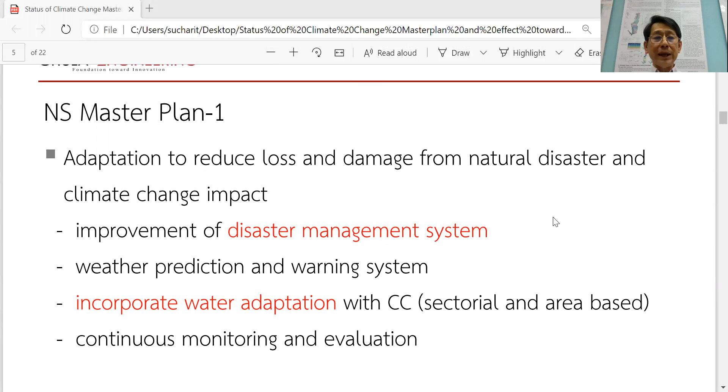So in the master plan, we identify that based on the climate change impact, we need to improve our disaster management system based on the risk level. We would like to incorporate water adaptation with climate change into the normal project development. So these are two main points in the master plan. At the same time, for the promotion, we need some new measures for economic and finance or budget support to implement such schemes. But for the large scale public infrastructure, we need to analyze and assess the impact starting from the project design phase. So this is mentioned in the master plan.

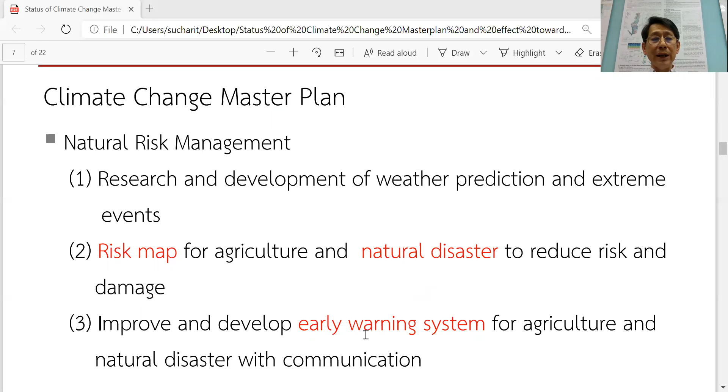After that, we have the climate change master plan. In the session of natural risk management, we also say that we need to have the risk map for both agriculture and natural disaster to reduce risk and damage, and also improve the early warning system for both agriculture and natural disaster with better communication. So these are the items in the climate change master plan. In order to implement that, now it's a kind of collaborative scheme.

But in the near future, we are drafting the Climate Change Act, in which, in the adaptation part, we have mentioned that we need to make a better prediction system so that we can assess the risk. So the identified agencies, the Thailand Meteorology Department and the Office of the National Environment Board, take care of this. This information will be informed to the concerned parties so that they can prevent or mitigate the risk of this kind of natural disaster. Where there are no rules, the National Climate Change Policy Board will consider and ask for cabinet approval for those cases.

Now we have a national adaptation plan, and we are monitoring. So with this act, the implementation under the law will be more officially enforced for public infrastructure development. So now, based on the cabinet resolution, we identify that large-scale infrastructure development needs to consider climate change impact assessment from the project design phase.

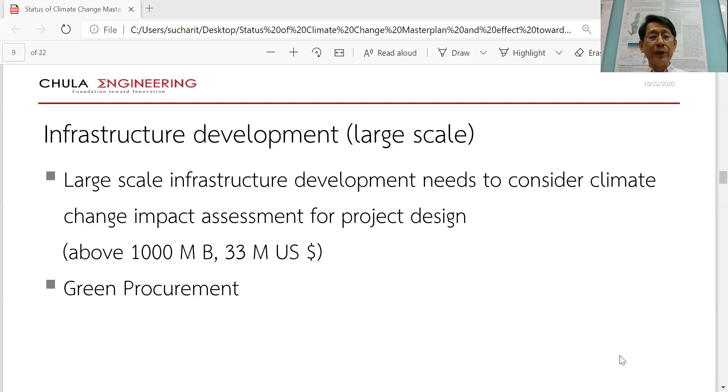So from our study, we also make a risk map. We also consider how much the climate, from weather conditions like temperature and rainfall, will change more. We have a certain rate, and in that area, if the impact is high, this will render much damage. So we divide the area into 4 zones: zones with high impact and high risk, low impact and

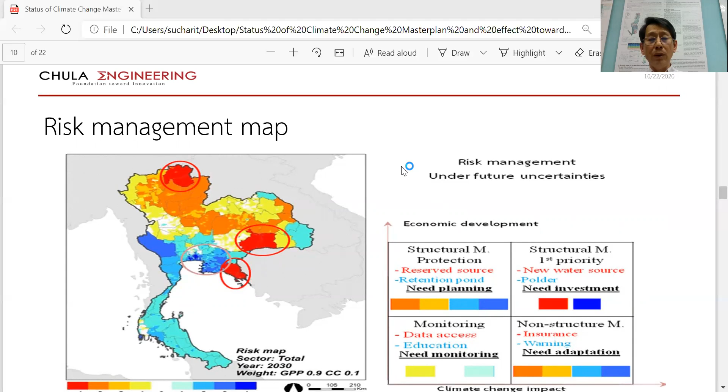So this is the basis for future infrastructure development, and the structural design may need more consideration when we build or design. So from that, we define the approach: for those areas with high risk and high impact, maybe we need new investment in infrastructure, like dikes or even dams. And for design criteria, up to now for a city we may set a 25-year return period. But in these highly important areas, they may raise it up to a 50-year return period.

For high risk but low impact, we may just modify our structures and link them to some retention or supplementary design. Maybe we need to heighten the dams we have, or need more retention. For low risk and high impact, we need some adaptation, like a warning system or evacuation areas. Then for the low risk and low impact areas, we need only monitoring and informing people when the disaster comes. So this is an approach for the area-based

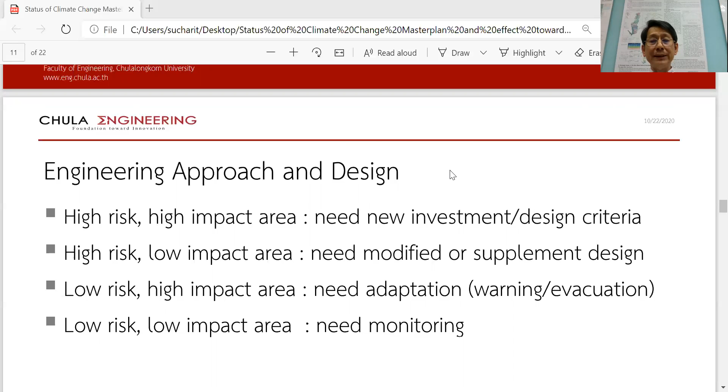vision. When we talk about areas by land use type, we also define measures for the city area, the municipal area, like a small city area, and the rural area. In the city, we are now trying to mix measures. We use both polders and a drainage system. We also have some retention from canals or retention areas, and then we zone the city area. There are green zones and some red zones. So we are now improving our infrastructure by giving it a higher return period design, from 25 to 50

years return period. But for the municipal area outside, maybe we can improve the measures we already built, but add more green-based solutions like retention or parks, or even areas with less population can be used as temporary retention. While in the rural area, the warning system. And we also try to make a community plan in certain areas with a lot of people. Outside, we use more nature-based solutions, for example retention areas, so that they can live without high damage from the disaster.

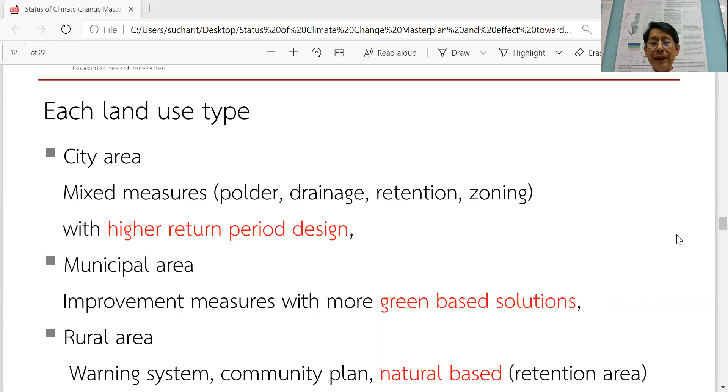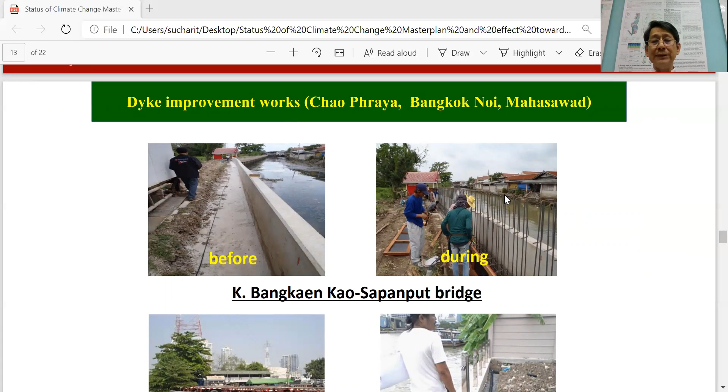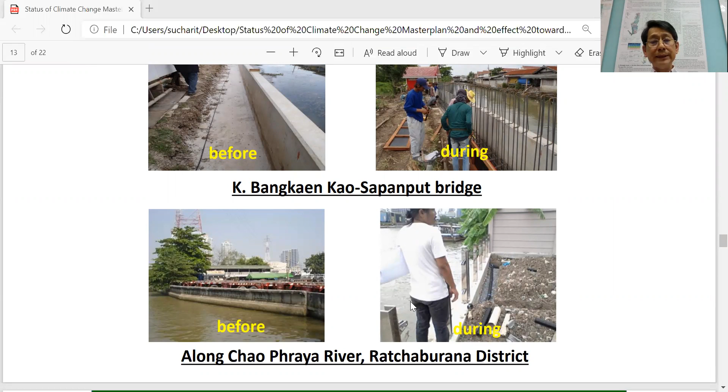So these are some samples that we made. You may remember in 2011 we had a big flood. After that, especially in the Bangkok area, we heightened the dike around the city. Before it was 25, now it becomes a 50 or 60-year return period based on the last extreme cases. This is the picture of us improving the dike, and then we made some heightened structures. These are some samples along the Chao Phraya, Ratchaburana area. So we heightened everything in the city to have a safer design.

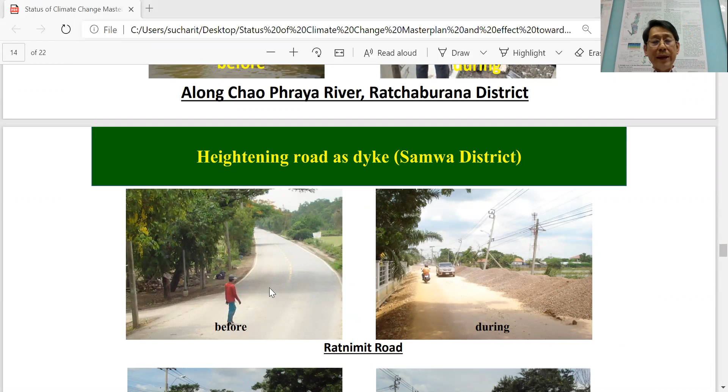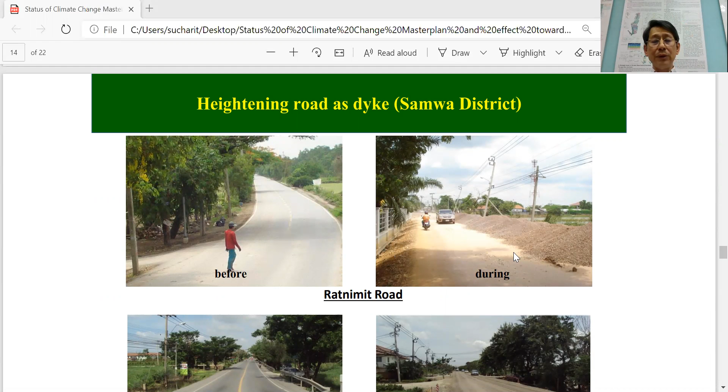In the area outside, yeah. If we have a certain area, we now heighten our roads so the road can be used for transport and also as a dike during flood time. So this is the measure in the municipal area: we can surround those municipal areas with a heightened road structure.

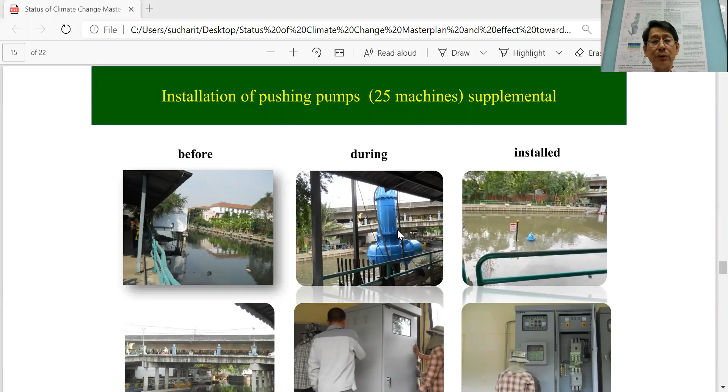Again, after we make a dike, we need more pumping capacity. As we know, in the city the canal area is very limited, and conveyance capacity is sometimes limited because of the high rain. So we install what we call pushing pumps in many areas where the section of the canal is smaller than in other areas. These pumps can increase the capacity of the flow in the encroached area. So this is a supplementary measure for the city area.

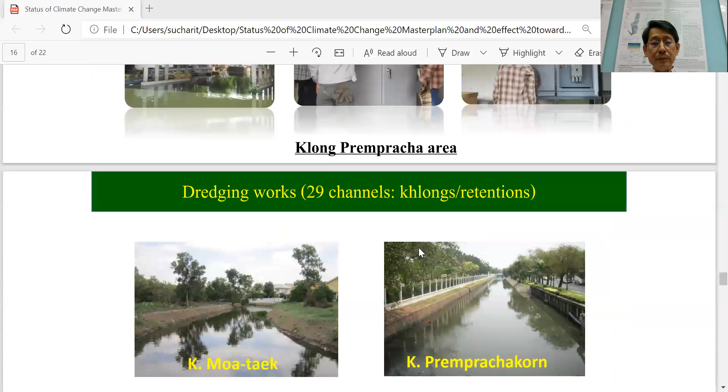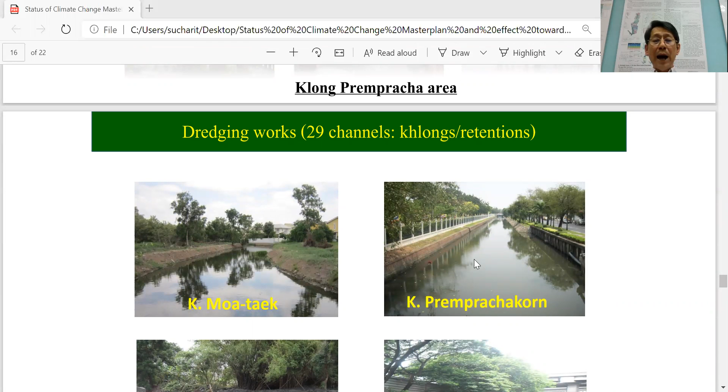Again, we need more retention. That's why there are dredging works in many canals, in parks, or in retention areas that need more space, so that water can be stored and retained until we can pump it out after the rainfall finishes. So these are the measures in the urban and municipal area.

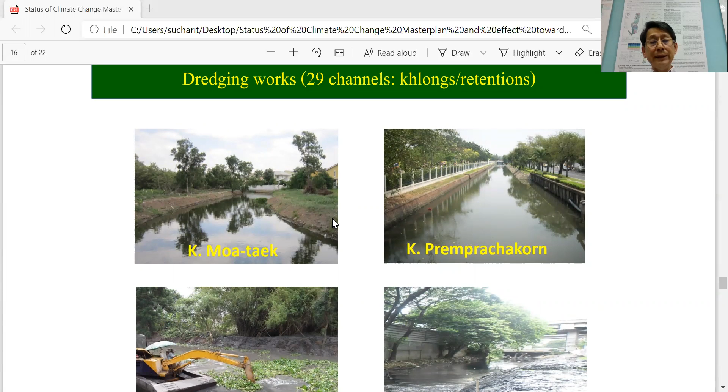Also in the rural area, we shift the rice cultivation so that people can start cultivating earlier, before the typhoon comes. During the typhoon, these areas store water that can be used for the dry season. While water is stored, the government also raises fish so people can catch fish for 2 or 3 months and earn some money. This is what we call a multi-purpose retention area in the rural area.

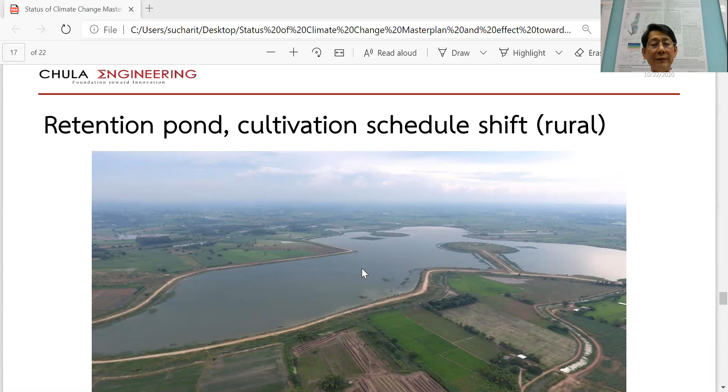In the rural or community area, we push for community water planning so they know where water can be stored and where the flood is. So we can move the water into places where it can be stored, and this water can also be used during the dry season. This is what we call robustness. And after the flood, we can drain so that people can move back, or be resilient, and resume their activities as fast as they can.

Also, we are starting green procurement. We are asking big firms, including the irrigation department, to choose materials like cement that use less energy and produce low greenhouse emissions. This is green procurement. We're starting to do this so that we can have cleaner air and also save the environment.

So you can see that in Thailand we have the National Strategic Plan on Climate Change, which has already started with the risk map and some supportive measures for green development and green procurement. We are drafting the Climate Change Act, which is in the process of public hearing. It may take another 6 months. After this finishes, we will move it to Parliament, and green development and procurement will be mandatory conditions that at least government agencies have to start and comply with.